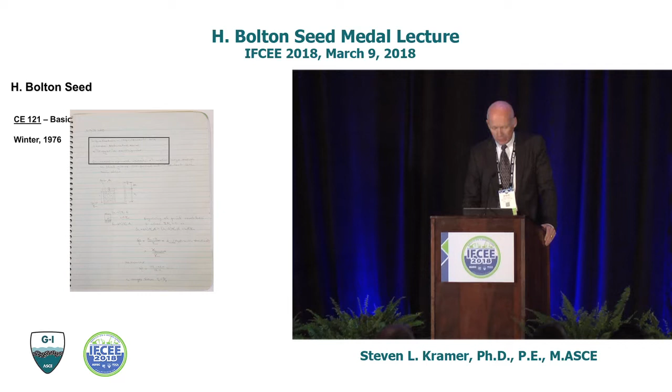I first encountered Harry Seed when I was 20 years old in winter quarter 1976 at Berkeley, and I took my first soil mechanics class. I went down to the basement and found my old notebook from that quarter. I was looking through it, and on February 9th, 1976, I saw the word liquefaction for the first time.

I went to grad school at Berkeley. I took a couple more classes from Professor Seed there. The Geotechnical Earthquake Engineering class reader consisted of 13 of his papers. They were about 3 inches thick, and they were fantastic papers, classic papers. But I remember at the time thinking, somebody ought to write a book on this stuff.

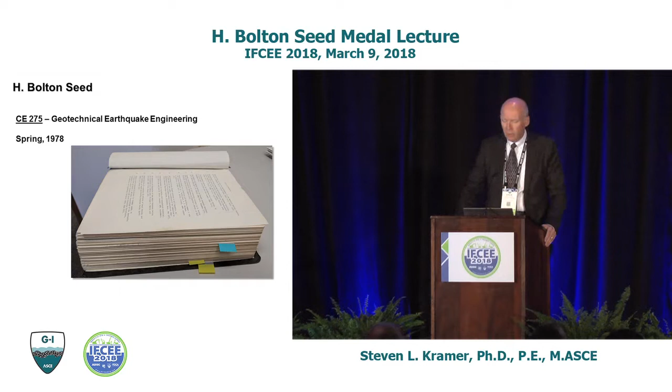I returned after 3 years in consulting to do a PhD. I was lucky enough to be asked to work on static liquefaction by Professor Seed, who had been put in charge of the forensic investigation of a large landslide that occurred at the port of Nice as they were expanding their airport there. Professor Seed was heavily involved with this, and I did laboratory testing in support of the investigation.

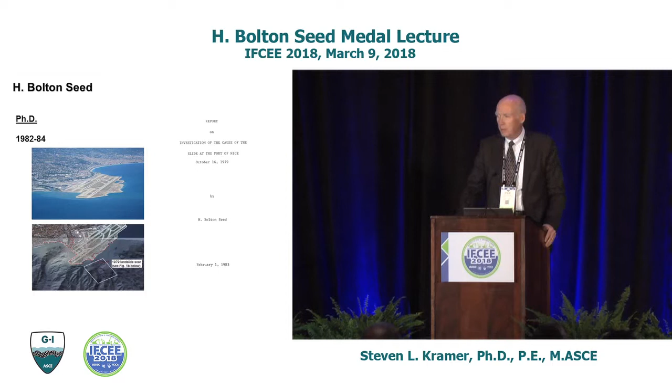He then moved on to be in charge of the Aswan Dam investigation. He was traveling a lot during those days, and I really treasured the time I was able to spend with him, where I learned a great deal.

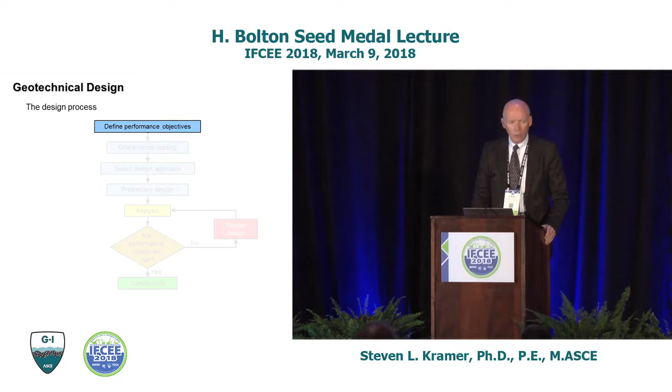We often define our performance objectives in a pretty informal way, and it does us well to think more explicitly about what we mean by performance. We can look at it in terms of demands exceeding capacities, usually expressing both in terms of forces or stresses. We compare the two by means of a factor of safety. We recognize that demands are uncertain, that capacities are uncertain, and we account for those uncertainties and the consequences of a failure in selecting a minimum allowable factor of safety for design purposes.

We can also look at performance in terms of deformations. There may be vertical settlements, lateral deformations, or some type of rocking deformations. But our deformation demands are uncertain, our deformation capacities are uncertain. We account for those uncertainties and the consequences of failure in selecting some maximum allowable level of deformation that we can design for.

We can look at performance in terms of physical damage, maybe the cracking of a floor slab, spalling of concrete from a column, or hinging of a pile. Maybe catastrophic damage that could lead to collapse. Damage states such as these are all uncertain. We can also look at losses as a performance objective: high repair costs, loss of serviceability of a system or structure, or casualties.

Performance means different things to different people. If you talk to a seismologist, they may say spectral acceleration or peak acceleration is a good indication of performance. To a geotechnical engineer, we might look at the displacement of a slope. An estimator may look at the width and spacing of cracks that need to be repaired in some slab. An owner is concerned with money, with finances, and looks at things from a financial standpoint.

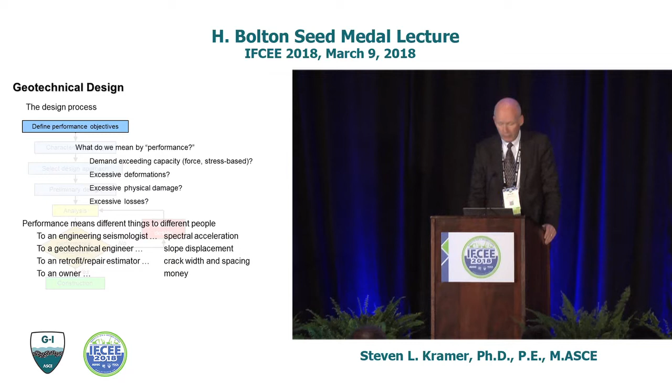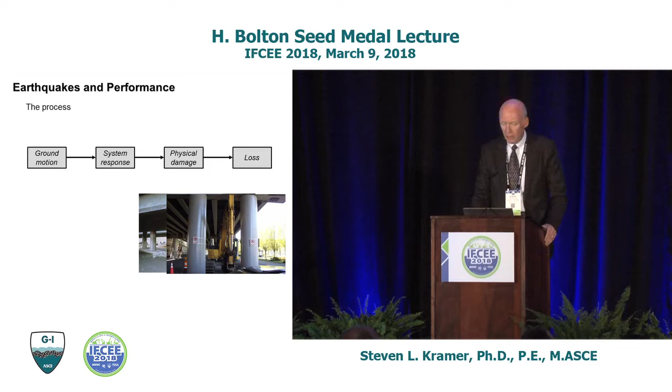The process that leads us to performance begins with ground motions. The ground motions excite some system that we're interested in. It might be a building, a bridge, a dam, a pipeline. If that response is excessive, we'll see some form of physical damage, and that damage leads to losses. Losses might be the cost of repairing bridge columns, say with steel jackets as shown here, or something much more difficult to quantify.

Performance-based design concepts started coming out in the 1990s or so, and they were first formalized by the Vision 2000 report that came out in 1996.

It advocated design for multiple return periods—4 different return periods: frequent, occasional, rare, and very rare ground motions—with 4 different levels of performance objectives: fully operational, operational, life-safe, and near collapse. Some of those combinations were considered to be unacceptable.

We don't want to design structures so that they're on the verge of collapse in frequent earthquakes. For typical earthquakes and typical structures, they were intended to be designed to be fully operational following frequent ground motions, operational following occasional motions, life-safe in rare motions, and to not collapse in very rare motions.

Essential or hazardous facilities or structures, such as hospitals, police and fire stations, emergency communication centers, were held to a higher standard. Safety critical structures, such as those that might contain toxic, radioactive, or explosive materials, were held to a higher standard yet. Ultimately, what we're interested in at the end are these losses.

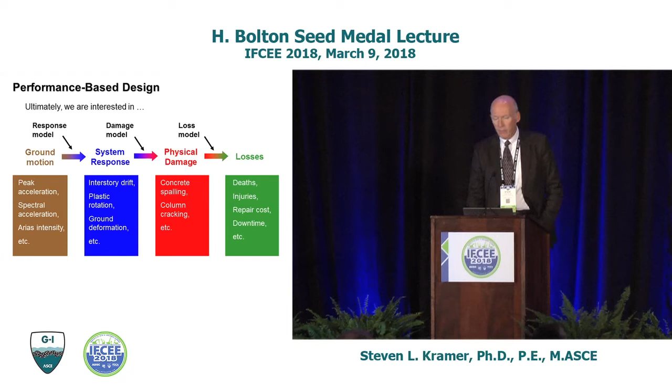These are what we want to try to minimize. They come from physical damage. The physical damage comes from the response of a system that we're interested in, and that response is excited by ground motions. Usually in engineering, we start at the beginning with a ground motion, and we use a response model to predict the response of the system we're interested in.

It may be something as simple as an empirical model that we can put into a spreadsheet or solve on a calculator, or it might be a multidimensional, nonlinear, effective stress finite element analysis. We could take our system response and predict damage by means of a damage model, and we use that damage to predict losses by means of a loss model.

There are a lot of terms that we can use to describe each of these quantities, so we need some terminology to make this communication a little bit easier, and I'm going to use the terminology that PEER developed. We use intensity measures to describe earthquake ground motions, engineering demand parameters to describe the system response, damage measures to describe physical damage, and we'll call losses decision variables.

So our response models allow us to calculate or predict the response of the EDP given some level of ground shaking or intensity measure. Our damage models predict the damage measure given the EDP. Our loss models predict the value of the decision variable given the damage.

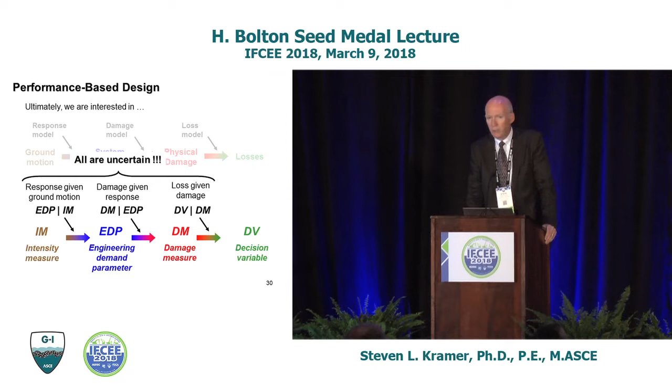All of these things are uncertain. The quantities themselves, the variables, are uncertain, and these models introduce uncertainty. We have to recognize that uncertainty is there. It's real. We can't ignore it.

There's uncertainty in ground motions that vary from location to location. Our uncertainty is different in the western U.S. than it is in the central and eastern U.S. There's uncertainty in response from site to site—we have different soil conditions, things respond differently. Different types of structures respond differently to the same ground motion.

There's uncertainty in damage from structure to structure. Steel buildings and concrete buildings get damaged differently. Tall and short buildings are damaged differently. There's uncertainty in loss too—it varies with location. Material costs and labor costs are different in different locations, and costs change over time with inflation, interest rates, and other things that are difficult to predict.

We have to recognize that one size doesn't fit all when it comes to handling uncertainty. We need to look at individual situations. If we ignore uncertainty or assume it's the same everywhere, we're going to end up with inaccurate predictions of performance, inconsistent levels of safety from one location and project to another, and inefficient use of resources when we have to retrofit or design new structures.

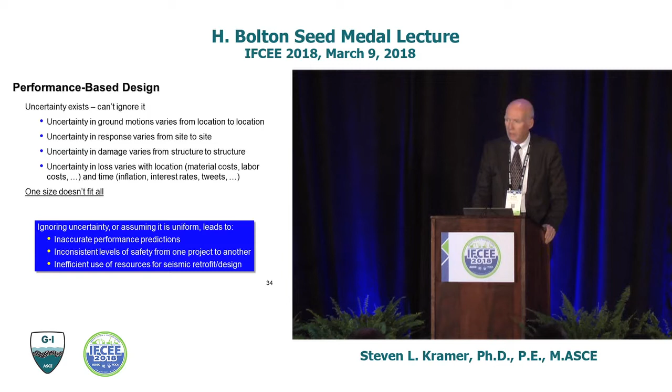So there are different approaches we can take. A discrete approach: we can divide up the possible ranges of ground motion, response, damage, and loss into a number of categories or ranges. If an earthquake occurs, we might assume that there are only 5 levels of earthquake shaking that can occur, denoted by intensity measures 1 through 5.

Maybe we're at IM2. And if that's the case, maybe there are 5 levels of response that are generated—maybe EDP level 4 occurs. There could be five levels of damage—maybe we see damage measure number 3. And we can have 5 different levels of loss—we have decision variable number 5. So we've got a path defined through this network from IM2 to EDP4 to DM3 to DV5.

If we want to predict the loss associated with that DV5, it's going to be equal to DV5, but we have to multiply it by the probability that the intensity measure really is IM2, given that an earthquake has occurred.

The probability at EDP, we're at EDP level 4, given that our intensity measure was IM2, and the probability of being in DM3 given that EDP was EDP4, and the probability of DV5 given DM3 - that's one path. We sum these over all paths and get the expected value, or average value, of the loss that we can expect. For this case, we'd have to go through 625 paths.

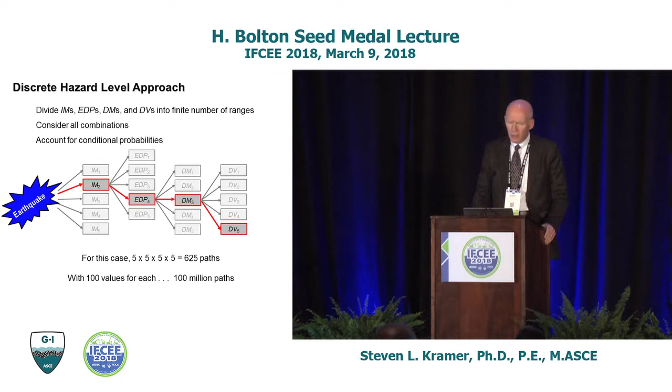If we discretize things in a more refined manner, the number of paths increases very quickly. So we can look at another approach, more of a continuum or integral hazard level approach, looking at all ranges of ground motion and accounting for the uncertainty in these parameters and their relationships. Such a framework was developed by PEER, the Pacific Earthquake Engineering Research Center, in the form of the well-known, famous, infamous triple integral, which is not as complicated as it looks.

The first part is the result of a probabilistic seismic hazard analysis. We do these things all the time - they tell us how often we expect to see different levels of ground shaking. Usually we get this by going to the USGS website, but for special or important projects, we do site-specific response or probabilistic seismic hazard analyses.

The next part comes from our response model. We use a probabilistic response model and express the results in terms of fragility curves that tell us the probability of exceeding a certain level of response given some level of shaking. So we have a family of these fragility curves, and similarly we'll have a family of fragility curves expressing the results of our damage models and loss models. We integrate over the ground motion, response, and damage, and end up with a loss curve that tells us how often we can expect to see different levels of loss.

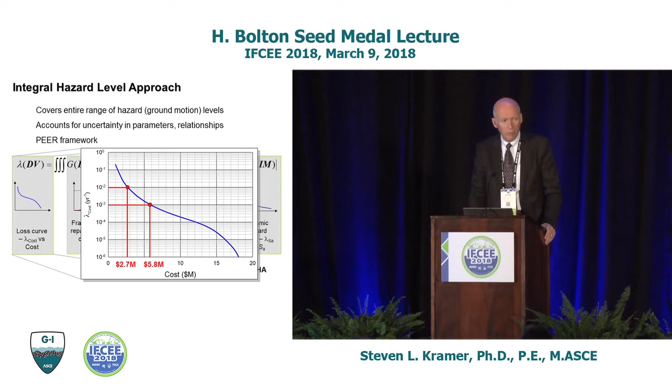The vertical axis here represents a mean annual rate of exceedance, which is approximately an annual probability. So we'd have a 1% probability in this case of having a loss of $2.7 million or more. Every 1,000 years, we'd have a 0.1% probability of a loss of $5.8 million. The reciprocal of that probability is the return period, so our $2.7 million loss would have a return period of 100 years. Every 1,000 years, we'd expect to see a loss at or exceeding $5.8 million for this particular design.

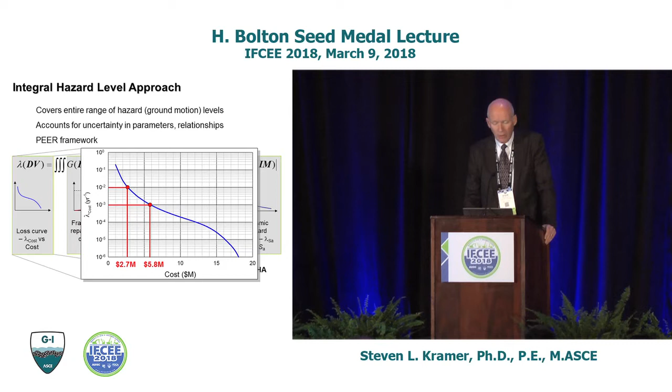If we try an alternative design and go through the same process, we'll get a different loss curve. For this one, our 100-year loss is now down to $1.6 million, and our 1,000-year loss is down to $3.9 million - better performance, at least expressed in terms of losses.

Well, that won't come free - there's going to be some extra cost involved in providing that extra margin of safety or reduction of loss. But within this type of performance-based framework, we can compare the benefits in terms of reduction of expected losses with the cost of providing those. And we can do it in terms that the people who hold the purse strings on decisions about seismic resilience are going to appreciate and respond to.

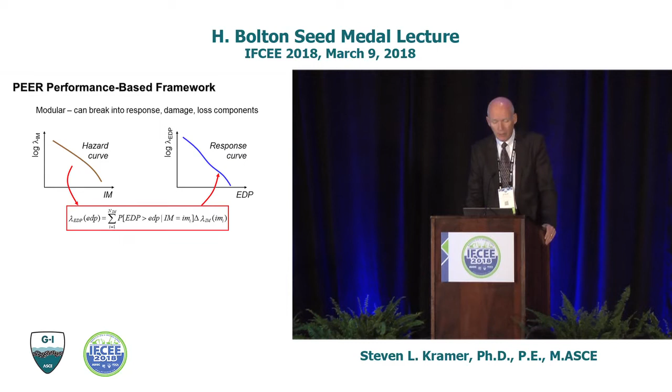One of the benefits of the PEER model is that it's modular. We can take a ground motion hazard curve, combine it with a response model, and get a response curve. We can combine that response curve with a damage model to get a damage curve, and combine that damage curve with a loss model to get our loss curve.

If we go through that whole process, we've included the effects of all earthquake magnitudes, all source-to-site distances. We've accounted for uncertainty in the ground motion, uncertainty in the response given the ground motion, uncertainty in the damage given the response, and uncertainty in the loss given the damage. So we've explicitly calculated all of these quantities with proper consideration of the uncertainty involved in each of them.

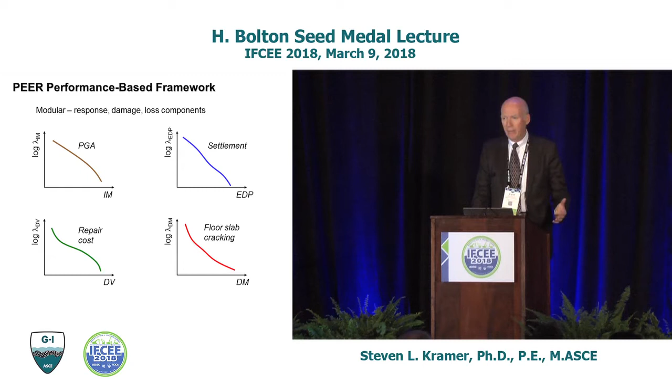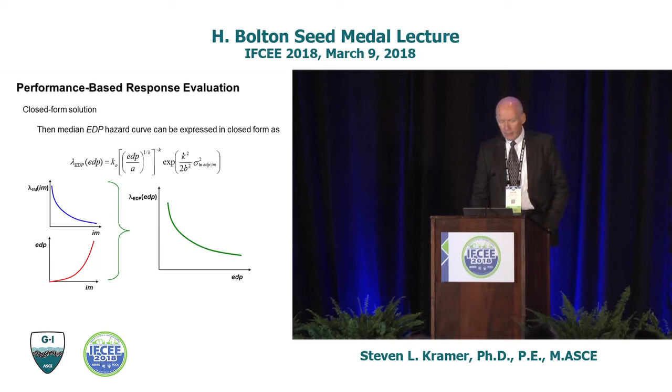Now, usually those relationships are complicated enough that we can't carry out those integrations in analytical form - we have to do them numerically. But if we make some simplifying assumptions, we can develop a closed-form solution, say, for a response hazard curve. If we assume a power law describes our ground motion hazard curve and a different power law describes the response model with log-normal uncertainty, we can combine these to get a closed-form solution for our response. Looking at it more closely, we'll see there are two components to it - one based on the median ground motion and the median response model.

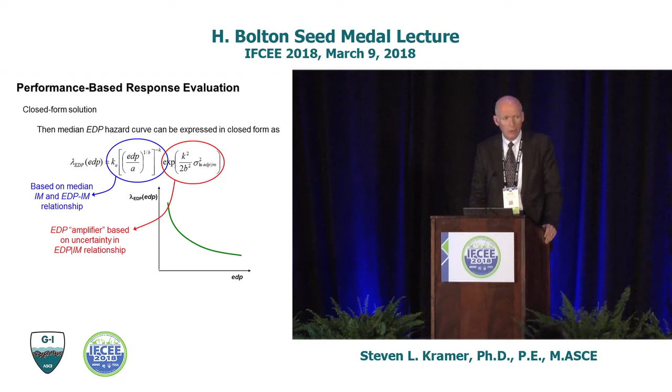We have a relationship that we can interpret as a response amplifier, with a value equal to 1 if the uncertainty is 0, and a value that increases as that uncertainty increases. We can take this approach and extend it to the damage measure and the decision variable, making the same basic assumptions, with two components: one based on median relationships, and another based on uncertainties that serves as an uncertainty amplifier.

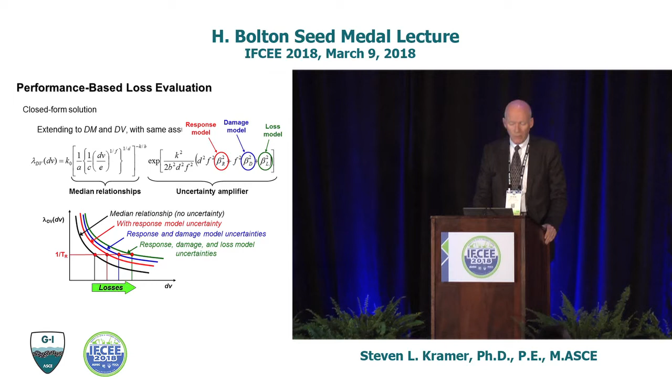Now it includes uncertainty in our response model, uncertainty in the damage model, and uncertainty in the loss model. Looking at the results, first neglecting uncertainty and just looking at median relationships, we might get a curve that looks like this. If we add in response model uncertainty, it moves up and to the right. Adding damage model uncertainty moves it some more, and loss model uncertainty causes it to move even more.

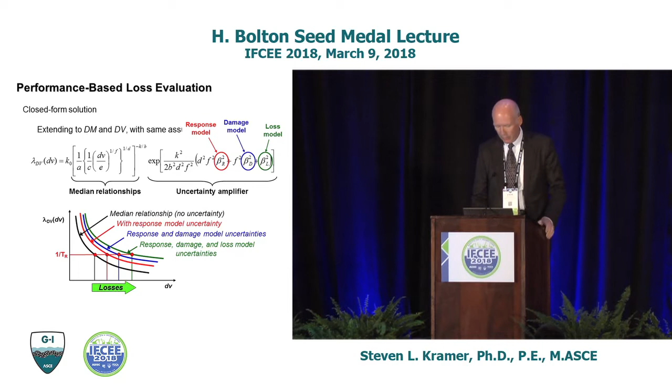So for a given return period, a given annual probability of occurrence, our losses go up as the uncertainty increases. One of the things we do as engineers is reduce uncertainty - we do more detailed subsurface investigations, better laboratory and field testing, more detailed analyses. This reduces uncertainty, which reduces the expected losses, and improves the value of the structure or system we're dealing with.

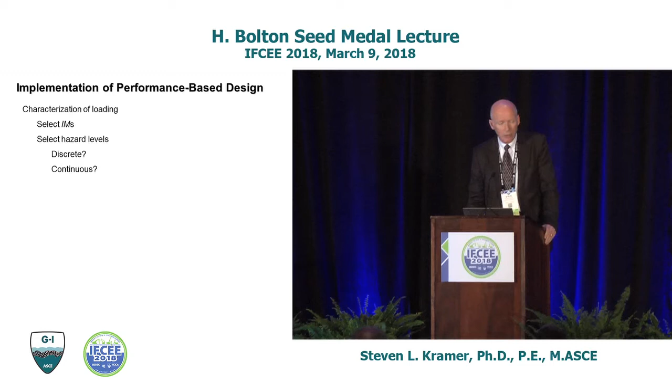So how do we implement these performance-based concepts? There are a number of different ways we can do that. After we characterize the loading, we have to decide how we're going to characterize performance - in terms of response, physical damage, or losses. We can do all three of these things.

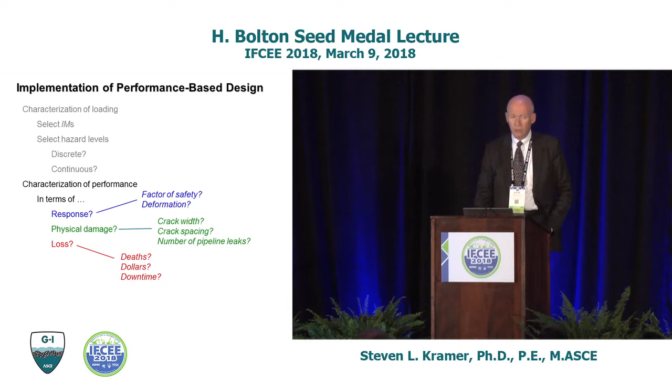If we do it in terms of response, we're going to use a response model to explicitly compute the response due to some level of ground shaking. We're then going to infer, without calculation, the damage, so it's going to be a little fuzzy, and we're going to infer the losses from our inferred damage, so it's fuzzier yet, more approximate.

This requires that we characterize and obtain, define allowable levels of response. Could be expressed in terms of forces, stresses, moments, or a factor of safety, or in terms of displacements. We know that physical damage is more closely related to displacements than it is to forces, and this is the way that performance-based design is currently done - implemented at this level where we're looking at deformations. We could, in many cases, substitute displacement-based design for most of the analyses that we do and call it performance-based design.

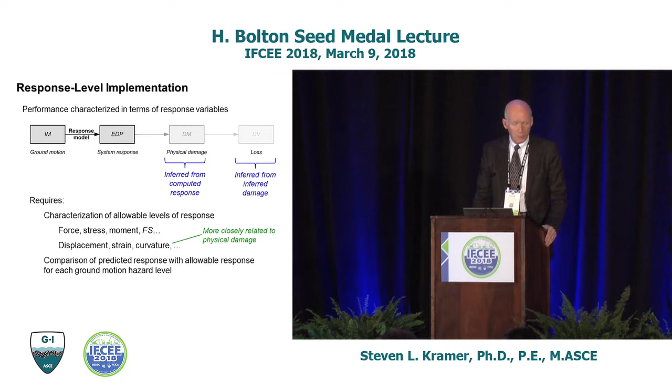Whichever way we do it, we'll end up comparing some predicted level of response with an allowable level of response for one or more ground motion hazard levels. If we apply this to liquefaction, we characterize our liquefaction potential - the potential for initiation or triggering of liquefaction - by means of a factor of safety that's a ratio of capacity to demand, or resistance to loading.

Our resistance typically comes from an empirical correlation to penetration resistance, or in some cases shear wave velocity. Our loading comes from the simplified method - it's a function of the peak acceleration and the magnitude of the earthquake that produced that peak acceleration. Our peak acceleration comes from a seismic hazard curve. We choose a return period, come across, and pick off the corresponding peak ground acceleration.

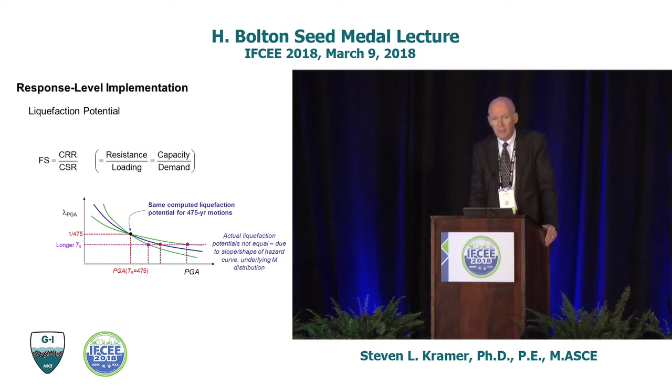But we should recognize that there could be multiple seismic hazard curves that pass through that same point. If they had the same underlying magnitude, we'd have the same liquefaction potential for all these cases by the conventional procedures we use. But if we use a longer return period, we'll find that liquefaction potentials are not the same. So the actual liquefaction potential depends on the whole seismic hazard curve, on all levels of shaking.

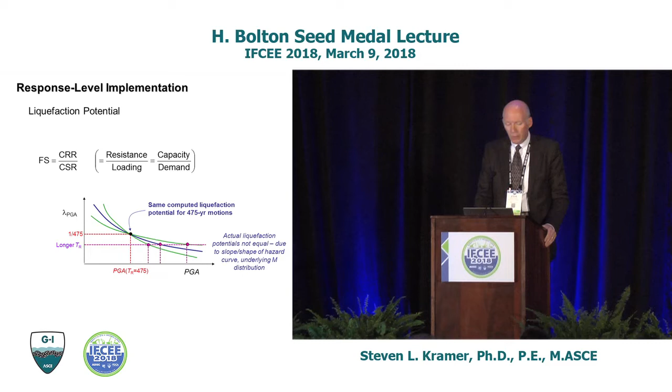So the way we do things now is to typically choose a return period, find the peak acceleration, calculate the corresponding magnitude from a deaggregation analysis, compute our cyclic stress ratio, get the cyclic resistance ratio from our penetration resistance, and calculate a factor of safety. We conventionally want to see that factor of safety have some minimum value that might be in this range.

So what we've done is take a probabilistic representation of our ground motion hazard and combine it with a deterministic representation of the liquefaction potential at one level of shaking. So we have one peak acceleration, one magnitude, and one cyclic stress ratio.

So let's talk about football.

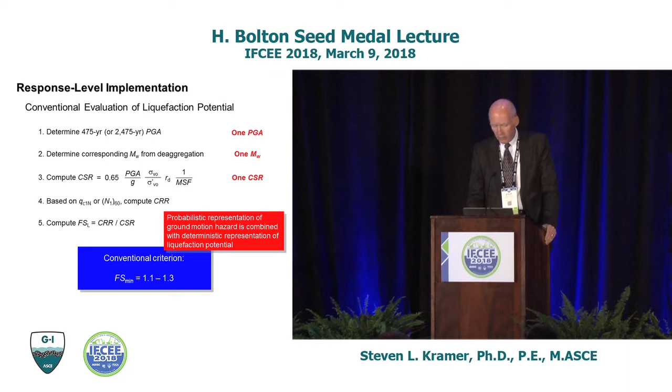We're here in Florida. It's a good sport. A lot of good football players come out of Florida, but we're not all from Florida. We're not all from the United States.

So a little review: 11 players on each side. They come in different sizes, run at different speeds, and there's different consequences when they hit you. The free safety on defense is a relatively small guy, very fast. They run all over the field, hitting people all the time on every play. They are a big factor.

The middle linebacker is bigger, not quite as fast, but those guys are still fast. They make most of their tackles in the middle of the field. And we've got the defensive tackles, the big pigs, 300 pounds or more. They don't run as fast, but when they hit people, they hit people.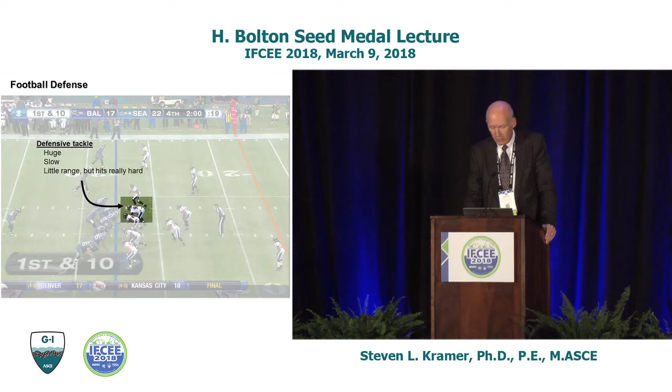So there's a lot of different hazards out there for the offense. If you're an offensive coordinator designing plays and calling plays, you have all these threats. You have these fast guys running around hitting you all the time, and you have the big, slow guys that are going to crush you if they hit you.

If offensive coordinators called plays like we do liquefaction analyses, we would see that they only block one player, the middle linebacker, say. The smaller players that hit more frequently and are a distinct threat to the success of our play, we ignore. The bigger players hit more rarely, but with more force, we ignore—just like we ignore earthquakes or ground motions of a size other than the one with our associated return period.

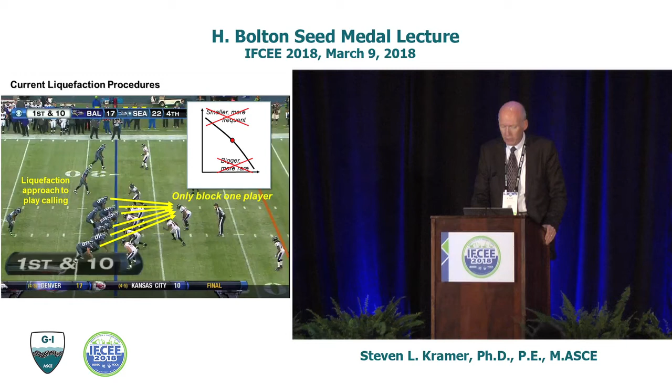So we can improve this procedure, and we have done this with a modified version of the PEER framework. My student Roy Mayfield did this as part of his PhD work, and he came up with an expression for the mean annual rate of non-exceedance of the factor of safety against liquefaction, because we're interested in low factors of safety in this case. We need a probabilistic liquefaction model, such as one by Boulanger and Idriss.

We're going to sum over all possible peak accelerations and consider all possible magnitudes that are supporting those peak accelerations. If we do that, we get a factor of safety hazard curve. It has the opposite slope of most hazard curves, because weak motions that occur frequently give us high factors of safety, and strong motions that occur rarely give us low factors of safety.

But if we're interested in a factor of safety of 1, the triggering of liquefaction, we can pick off the mean annual rate of non-exceedance, or its reciprocal, the return period of liquefaction, considering all peak acceleration levels, all levels of ground motion, and all of the magnitudes that underlie them.

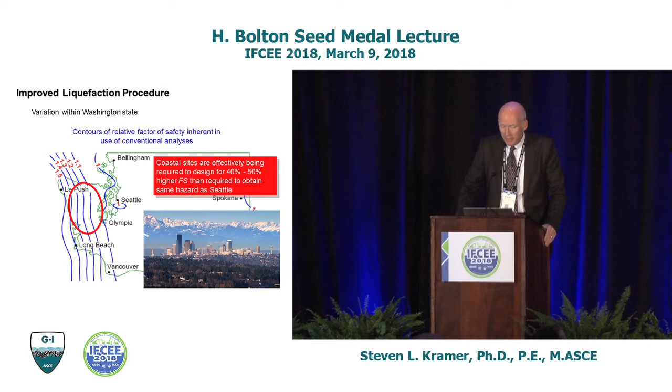Now, that's important to our Department of Transportation, because if you look west from Seattle on a typical sunny, clear day, you see the Olympic Mountains on the Olympic Peninsula. Those Olympic Mountains drain to the west, and there are many rivers going down along the coast. There are 13 large ones indicated by the red circles there, but there are a lot of small ones as well. Our DOT has to design new bridges and retrofit existing bridges.

And they're having to do that with an extra factor of safety of 1.5 or so. It costs a lot of money that could be spent to retrofit other bridges, maybe in more heavily populated and heavily trafficked areas, than the ones they're having to spend their money on now.

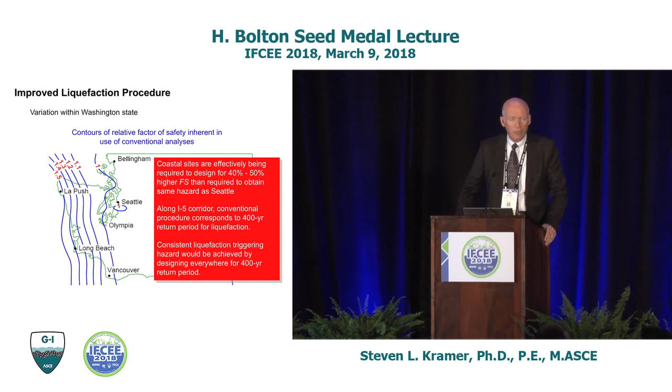Along the I-5 corridor, our conventional procedures, using ground motions with a 475-year return period, give us an actual return period of liquefaction of about 400 years. So if we wanted uniformity within the state of Washington, equivalent everywhere to where it is in Seattle, we should be designing for a 400-year return period. Now, whether that's the right number or not, I don't know, but we can determine what the right number should be, and we can do this in other places.

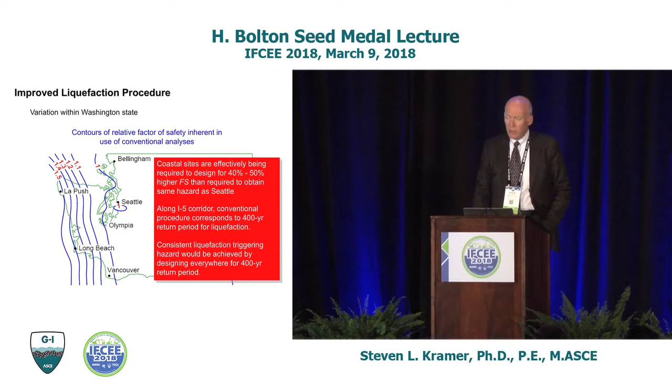Our current approach is to design for a specific deterministic factor of safety based on a ground motion with a certain return period. A better, improved approach would be to design for the return period, considering all levels of ground motion that could occur.

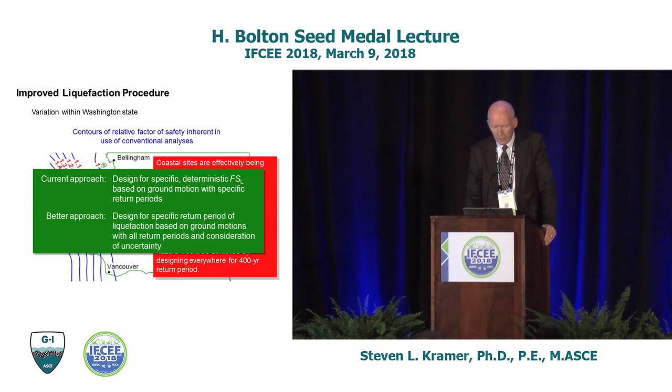These PLHA calculations are not terribly complicated, but you have to do a lot of them, hundreds of thousands of probabilistic calculations. So we need tools to do this. We've developed for the state of Washington a computer program with a nice Windows interface. It handles triggering, lateral spreading, and free field settlement. We're in the process of updating and expanding this in a way that will make it useful in all states.

Kevin Franke at BYU has an Excel-based program called PB LiquefY. I just talked to him, and he said he's abandoning this in favor of a C++ program that's currently under development, so we'll look forward to having that option available before too long as well.

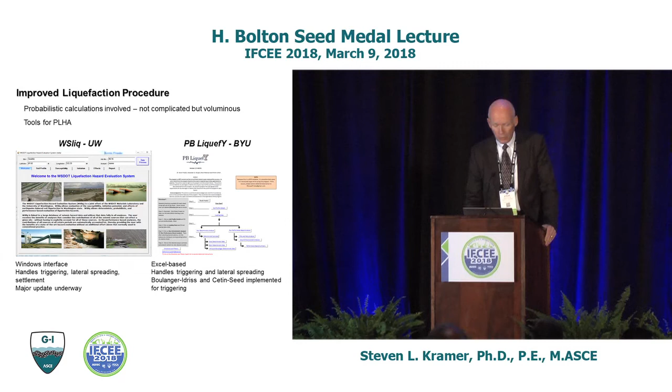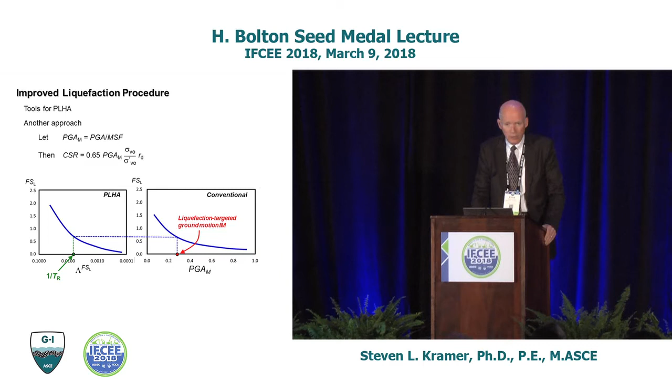We could then choose a return period of liquefaction, considering all magnitudes and all peak acceleration levels, calculate the factor of safety, come over to our conventional procedure, and find the value of PGA sub m that corresponds to that. That value, if plugged into a conventional analysis, the kind of analysis people are accustomed to doing now, would give us the same factor of safety that you would get if you'd done a full-blown probabilistic liquefaction hazard analysis.

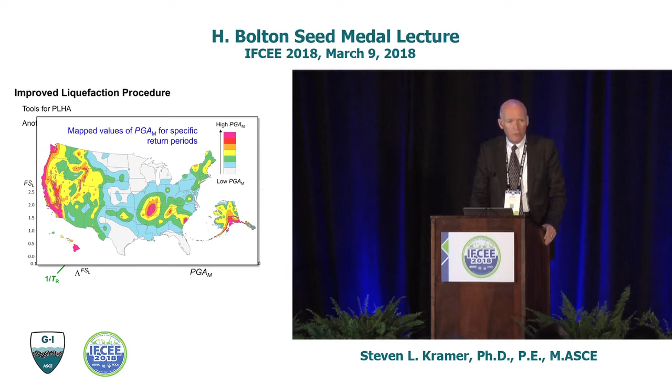So we could consider this a liquefaction-targeted ground motion intensity measure. We could do these calculations on a grid all across the United States and map those values for different return periods. Or we could develop a website where a user could go, like they do for ground motion hazard information now, put in a latitude and longitude, a site characteristic like VS30, a return period of interest, and get a PGA sub m value. That would allow users to do the same type of relatively simple deterministic calculations they're doing now and get a factor of safety that's consistent with a defined return period, with all the benefits of the full-blown PLHA.

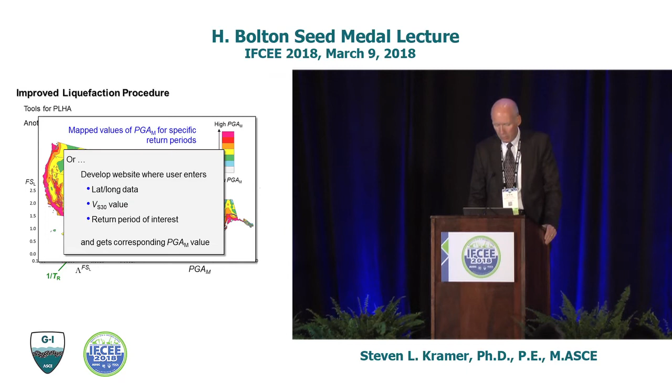So we've taken this idea to the Building Seismic Safety Council, responsible for the NEHRP seismic provisions that end up in various codes, and met with their provisions update committee, where they're very responsive to the idea, supporting it pending validation of the approach. That really boils down to determining how sensitive this intensity measure would be to factors that affect liquefaction potential.

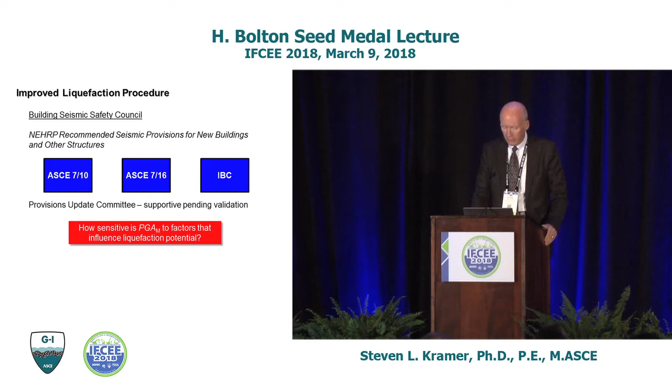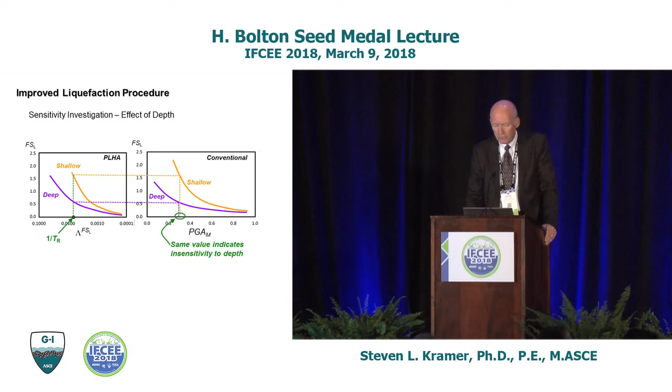We would expect some of those factors to be soil density. We'd expect that at a given return period, we'll have a higher factor of safety for a dense soil than for a loose soil, in both a PLHA and a conventional analysis. If the effect is similar on both, we should see the same value of the PGA sub m parameter. We do the same thing with depth, comparing shallow and deep cases. We've gotten some funding from the National Institute of Standards and Technology to demonstrate this validity, and we're going through and checking this on sites all across the United States.

At longer return periods, we're going to need some correction factor, but it seems to be well behaved enough that correction factor should be relatively simple to implement.

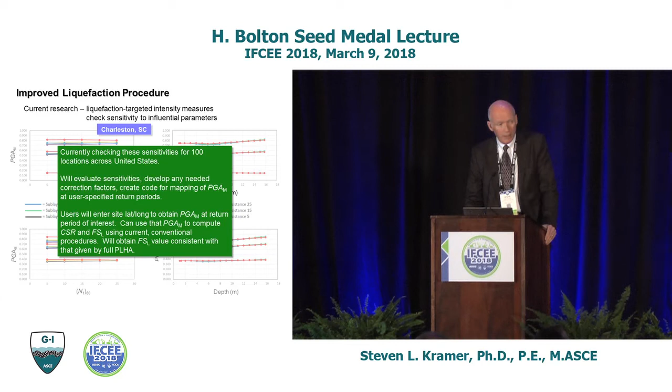We're looking at this same behavior for 100 sites across the United States. We'll evaluate these sensitivities, develop the correction factors that are needed, and create a program that will allow us to map this parameter at user-specified return periods. So the user can enter a site latitude and longitude and VS30 value, get a value of PGA sub M that they use in their conventional calculations, and get a result that's consistent with what they would have had doing a full-blown PLHA. So that's triggering.

Triggering is useful. We're interested to know whether or not liquefaction is likely to occur, but we're more interested in the deformations because that's what's going to cause damage.

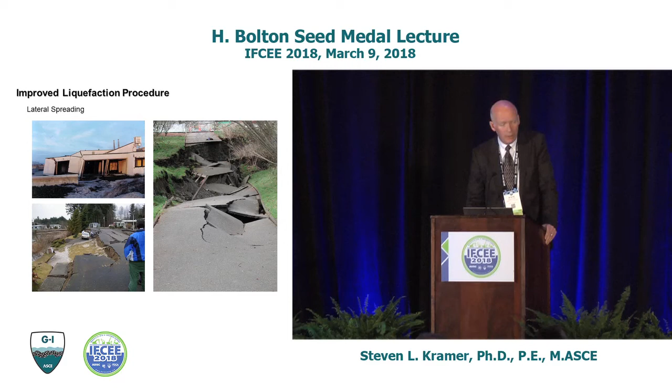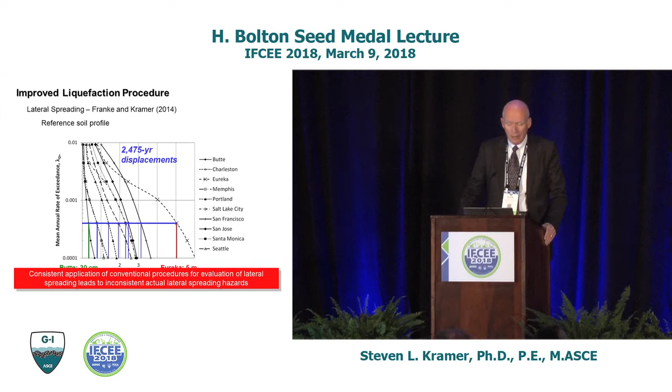Kevin's gone through the same kind of process that we did for triggering and has shown that applying these existing conventional lateral spreading procedures consistently gives us even more inconsistent lateral spreading hazards.

So the second phase of the work we're doing is oriented towards developing improved probabilistic lateral spreading hazard analysis procedures. Our procedure will account for the timing of liquefaction, and we'll be using a vector or multiple intensity measure approach where we recognize that the soil profile changes when liquefaction is triggered.

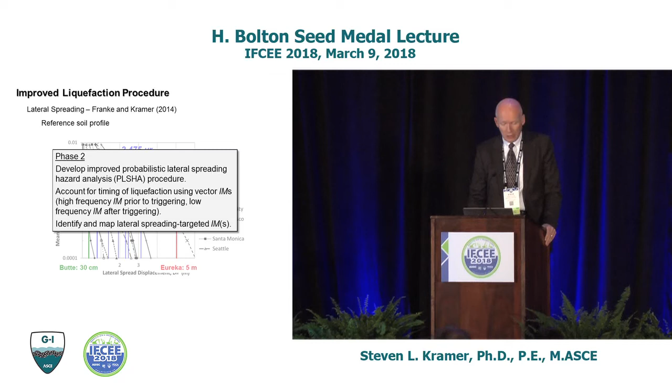We'll use intensity measures that are sensitive to high frequencies up to the point of triggering of liquefaction, and low frequencies to better represent the behavior of a softened profile after liquefaction has occurred. We'll identify these intensity measures and map them so they can be used for lateral spreading predictions in a similar manner.

If we look at a loss level interpretation and implementation and go all the way to the final result of losses, applying it to a real type of system that may consist of a bridge with abutments, piers, foundations, approach embankments, and soil supporting those things, we can see how we can do the full implementation.

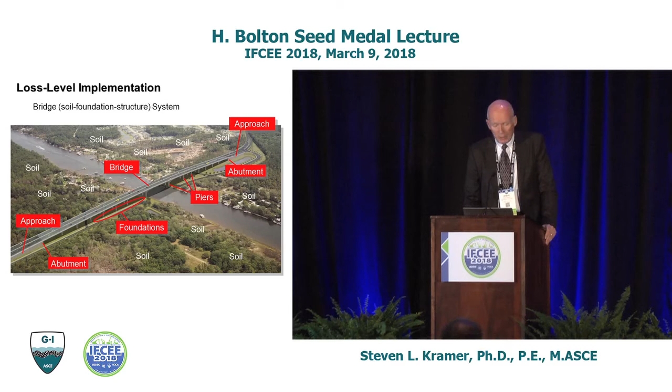We did this for a profile that had a variable thickness of liquefiable sand, about 10 meters on the right side, only 4 meters on the left side, but a layer of clay under the left side that doesn't exist on the right side.

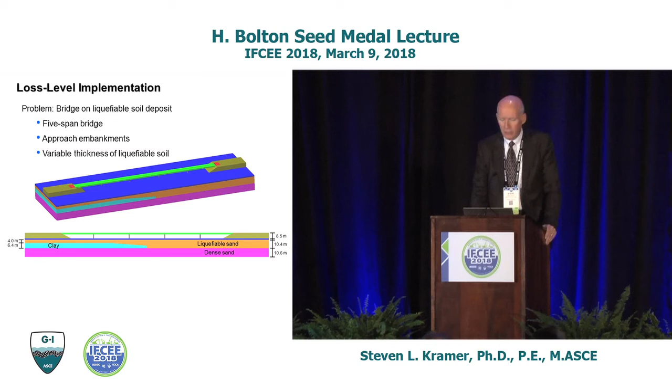We had a bridge designed to Caltrans specifications by an experienced structural engineer who had designed a lot of bridges for Caltrans. It's a box girder structure, 5 spans, supported on 4-foot diameter columns.

They were supported on the interior columns by 2x3 groups of 24-inch diameter steel pipe piles, 1x6 groups at the abutments. There were expansion joints and elastomeric bearings at the abutments, and a break-off back wall at the abutment.

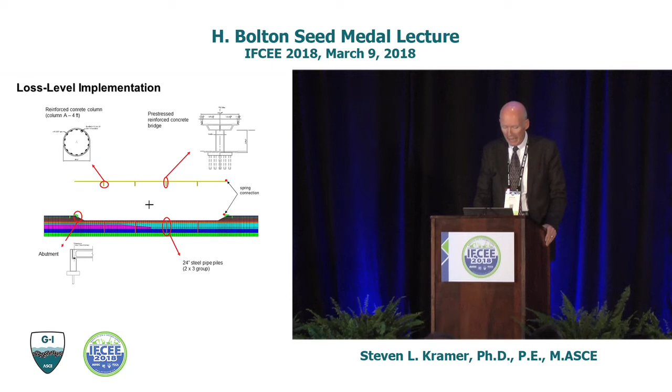The structural model was developed by Kevin Mackie and Bozidar Stojadinovic at Berkeley. It's a very detailed structural model using the OpenSees computer program.

We built the foundation model with Pedro Arduino and Hyung-Suk Shin. It's a very detailed foundation and soil model. The piles are represented by PY, TZ, and QZ springs. The soil models for the liquefiable soils use Ahmed Elgamal's pressure-dependent multi-yield model, and the pressure-independent multi-yield model for the clay soils.

When we analyzed the site without the bridge in place, we saw, as expected, higher displacements on the right side where the liquefiable soils were thicker, and lower displacements on the left side. Both moved towards the center of the model, and we also saw some deformations in the clay layer that existed on the left side.

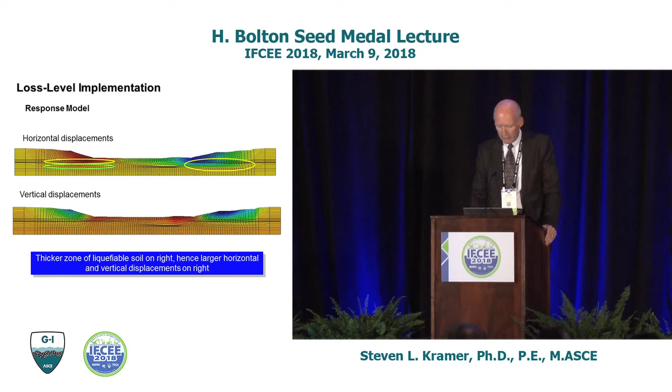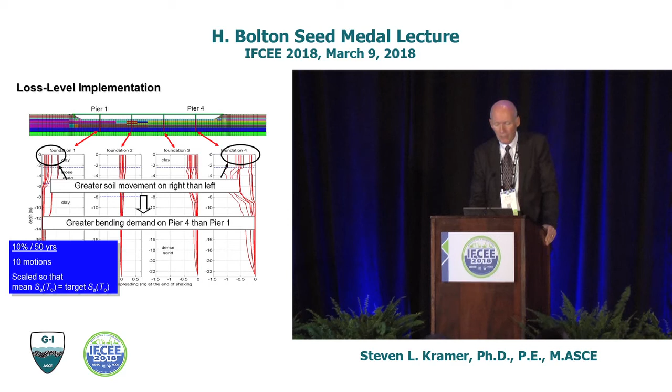Looking at the 475-year ground motions, we ran 10 motions scaled to the same fundamental mode spectral acceleration through this, and we saw again higher displacements on the right side than on the left side, implying higher bending demands on Pier 4 on the right side than on Pier 1 on the left side. However, the bridge deck was shoved to the left by the deformations that had occurred.

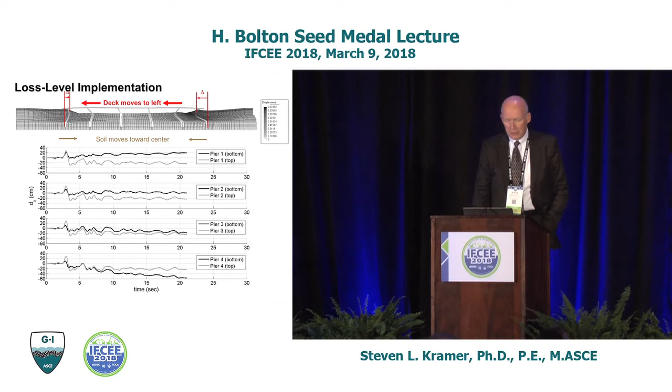Looking at Pier 1 and Pier 4, Pier 4 did move more at its base towards the center than Pier 1 did, but the bridge moved over 21 centimeters, so the actual drift levels were higher on the left because of the system response of this bridge. It really illustrated something we hadn't anticipated in advance. You really get a benefit from analyzing the entire system, because that system behavior can have a great effect on patterns and amounts of damage that occur.

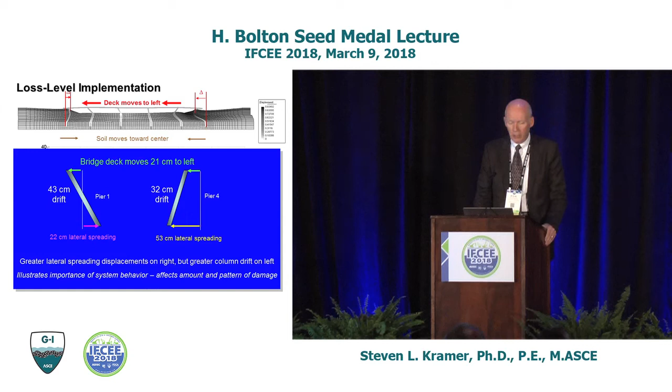It was a complicated bridge structure, so we had to use a number of parameters to describe its response. We had 25 engineering demand parameters associated with the bridge deck performance, the columns, pile cap, expansion joints, the back wall of the abutment, vertical offset at the abutments, bearing pad displacements, and displacements of the two approach embankments.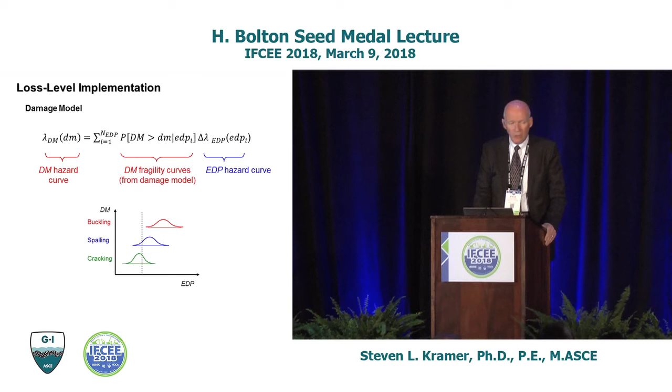We used a discrete damage probability matrix approach, which allowed us to define probabilities of being in different damage states for a given level of response. So for 10 to 30 centimeters of displacement, there's a 60% chance of moderate damage, and smaller probabilities of being in other damage states on either side. That allowed us to come up with a damage curve.

So minor damage is what we would expect to see for this bridge. The bridge was located in Oakland, California, where we have a pretty high level of seismicity, and that's where the ground motions came from. Moderate damage every 37 years, severe damage every 105 years, and catastrophic damage would be very rare for this particular bridge. Then we could go on and look at losses and use our loss fragility model to calculate a loss curve.

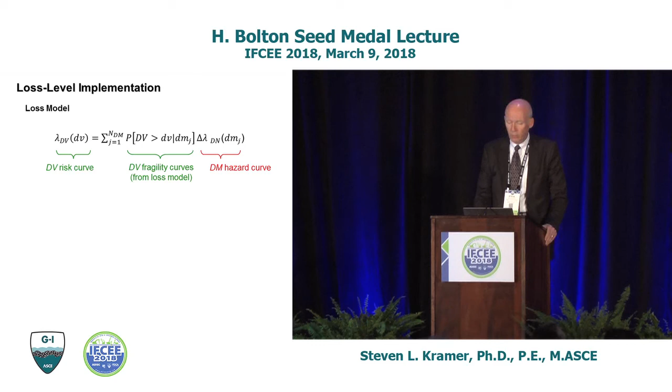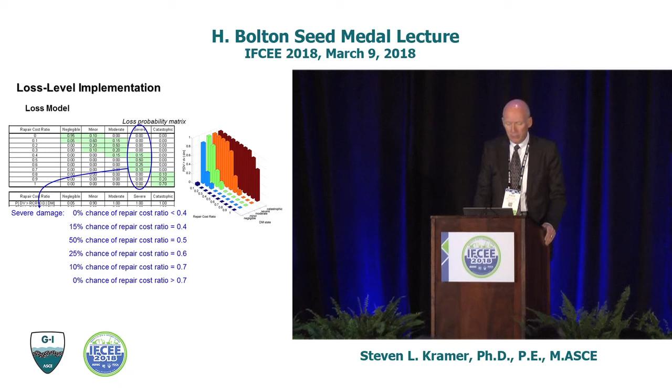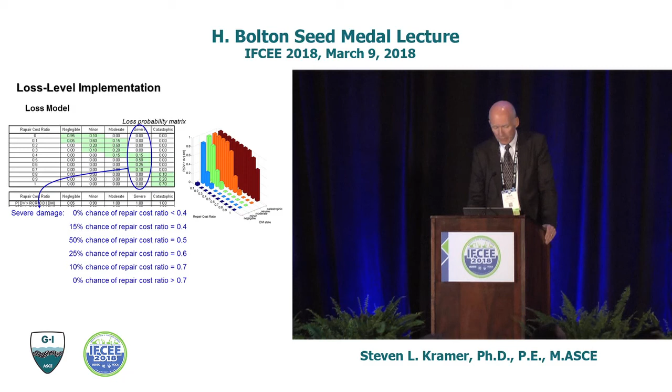We did this in conjunction with Caltrans engineers who were experienced at estimating repair costs from bridges damaged by earthquakes, using a discrete loss probability matrix. For severe damage, there's a 50% chance of a repair cost ratio, which we defined as the repair cost divided by the replacement cost of the bridge, being 0.5 - meaning your repair costs are going to be half the replacement value of the bridge, with lower probabilities for other repair cost ratios. That allowed us to produce a loss curve for this bridge.

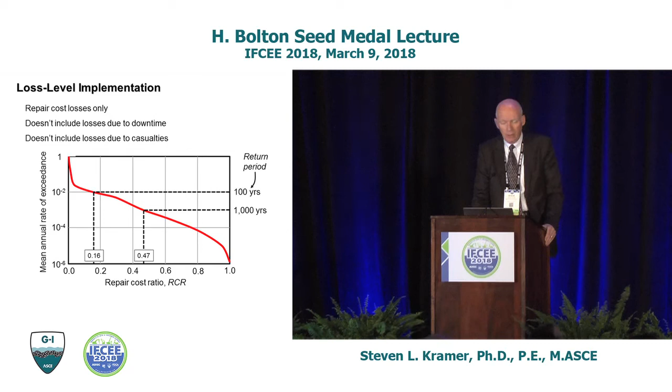It doesn't include losses due to downtime, it's only repair costs. Downtime losses could be many times greater than the repair costs if it's a bridge that isn't redundant, if it slows traffic down and people have to go a long way around it. It also doesn't include losses due to casualties, so it's only part of the picture.

For a return period of 100 years, our loss ratio was about 16%. At a 1,000-year return period, it was 47%.

We then looked at this case a little bit differently. This represented a loss curve if liquefaction occurred. We repeated the analyses, not allowing liquefaction to occur, and when we did that, we found that our loss curve looked like this: at 100 years, the loss dropped down to 6% of the replacement value, and at 1,000 years, it was only 29%. So if that's a $100 million bridge, our 1,000-year loss is $18 million less than it would have been.

We can put things in these kinds of numbers and make a determination of whether it's worth investing in soil improvement in order to get that loss down. These are the kinds of things we can do with this type of framework that we typically haven't been able to do in the past. We also, just to see what would happen, assumed that the bridge was sitting on rock.

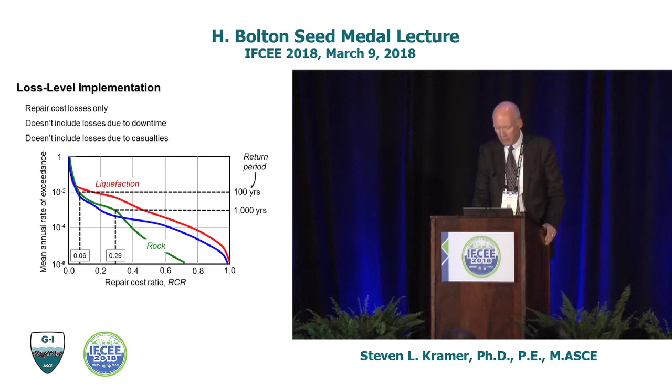And when we did that, our damage levels went up a little bit from the case where we're on the non-liquefiable soil profile, because the rock foundations were so rigid that they couldn't rock or rotate at the base of the piers, and there was more damage to the piers than there would be with the compliance of a foundation that was on soil.

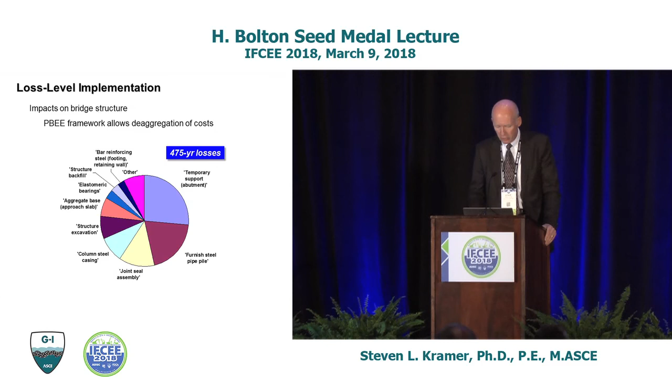Another big benefit of this type of approach is we can see where our losses come from by deaggregating these results, so that we can see what factors are contributing the most to the losses that we would anticipate, and do this at different return periods.

So I want to close with some thoughts on what performance-based design and performance-based procedures mean for geotechnical practice. What's it going to require of geotechnical engineers? Well, we have to have a good understanding of the big picture and our role in it.

Geotechnical engineering has high uncertainties. We know this, we deal with it all the time, but we're not the only ones with high uncertainties. There's high uncertainties in damage, there's high uncertainties in losses. And so we need to know where we fit in that picture, which means we need to be able to

think probabilistically. We can improve our procedures above where they are now by looking at more efficient parameters that are better descriptors of potential damage or response or of loss. So we can come up with problem-specific intensity measures.

Different characteristics of ground motions affect different problems differently. We can come up with EDPs, or measures of response, that are more closely related to damage, and damage measures that are most closely related to losses.

We can develop improved response models that help us account for uncertainties in better ways. They need to be able to predict deformations. They need to be able to handle both weak motions and very strong motions, because in this procedure, we consider all levels of shaking, not just one.

We need improved damage models, and this is a place where we could work profitably with structural engineers to get a better idea of what kind of deformations really cause damage, rather than having somebody tell us they're building this incredibly large structure and it can't move more than 1/10 of an inch.

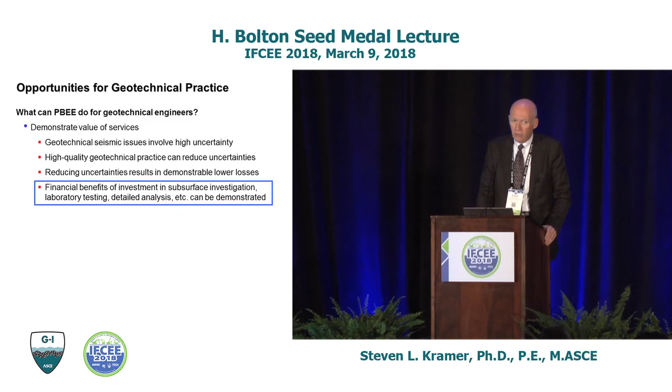We can account for the high uncertainties that we often have to deal with. We can use these techniques to demonstrate the value of our services, to demonstrate how we, as geotechnical engineers, can do better subsurface investigations, do more detailed analyses, reduce uncertainty, improve accuracy, and show how that benefits in terms that an owner can understand and result in lower losses.

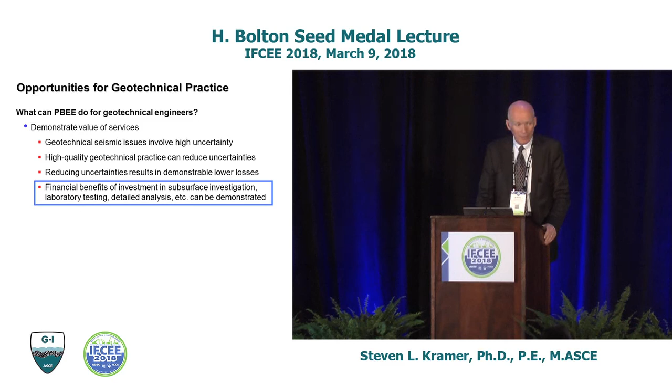So the benefits of investing in improved investigations, laboratory and field testing, and more detailed analyses can be demonstrated in those types of terms. Be more involved with codes development. The performance-based approach gives us an incentive to go beyond minimum code requirements so that we can provide this kind of value to our owners.

If we implement these procedures into codes or elements of them into codes, it can allow us to reduce uncertainty, and our ability to reduce uncertainty through the types of detailed analyses that we can and would like to do to benefit our client. Thank you very much for your attendance.